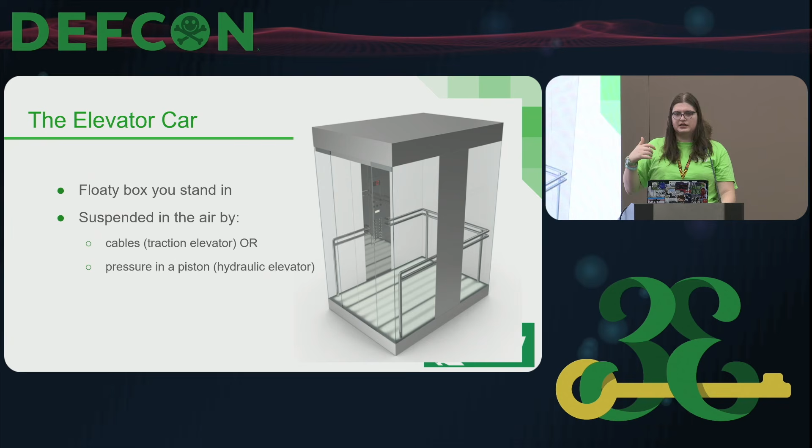Let's get started with some of the basics and some of the terminology that we're going to be using. So the floaty box that you stand in is called the elevator car. It is suspended either from the top by cables, that's called a traction elevator, or from the bottom up using pressure in a hydraulic piston, that's called a hydraulic elevator. So these are how they move. Oh, and important is, for the traction elevator, there's a counterweight to counter the weight of the car, and that is one of the dangers that we're going to be pointing out about hoistway access, which again you shouldn't do.

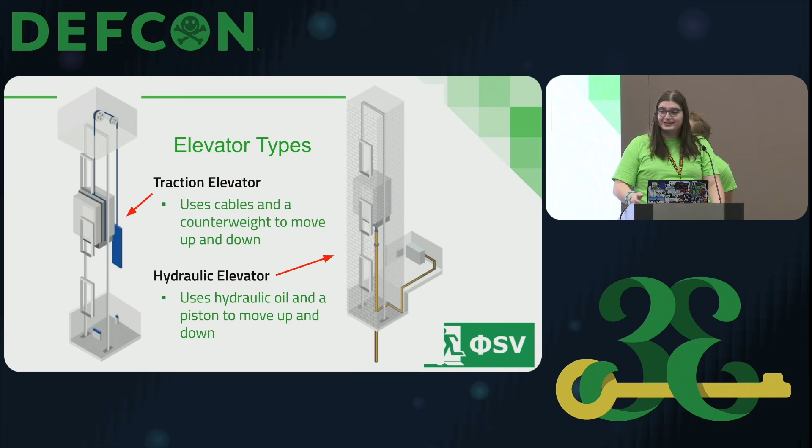Now, there are instances where we can't necessarily use the car buttons because they're locked out. The elevator controller is not letting us because we haven't presented a valid credential. And how can we avoid registering our car call, but still make our way up to a restricted floor? This doesn't always work, but when it does, it's actually kind of neat. And to explain that, I want to explain something called homing. The elevator doesn't always just sit at the floor it was last left at.

So for example, at hotels, if it's around check-in time, it might be programmed to go down to the lobby, even if it left someone at the 25th floor, because chances are the next person using the elevator is also going to be going up from the lobby. So we want that person to wait the least amount of time as possible so that it's a better user experience.

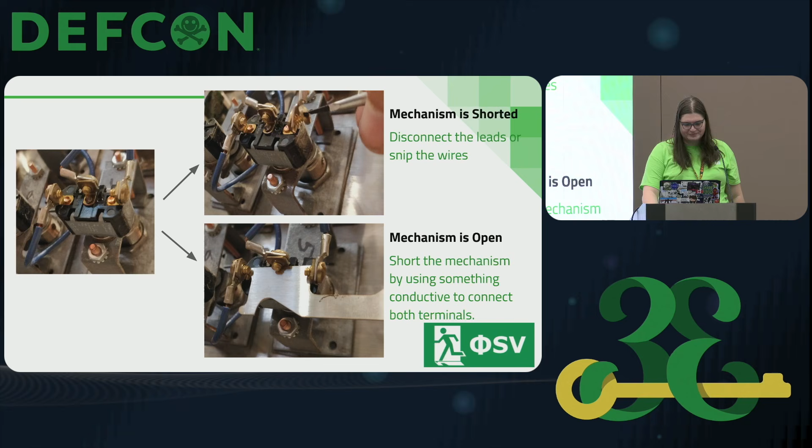Oh, and another one that sometimes comes up is when I press a button, it lights up, but then the elevator controller realizes I shouldn't have access, and it unlights it instead of staying lit up like a car call would normally behave. Can I just push it in, hold it pressed in, and then it'll just stay lit up the whole time? Almost certainly no. We gotta address this sometimes. Almost certainly no, but Bobby has seen it happen in 2 engagements, I think you said? 2 engagements, yeah. This has actually worked. We have no idea how it worked. My presumption is that he was just seeing what happens and then it worked. I don't know. So if you have nothing else you can try this, but it's probably not gonna work.

Alrighty, and I'm gonna pass it off to Bobby for hoistway access, which will start with a safety disclaimer again. Alrighty, so we're gonna get into hoistway access. So once again, another quick safety disclaimer. This is something that should be performed by trained professionals only. It is very dangerous, it can kill you. There are a plethora of things that are obviously dangerous in these pictures. There are also a ton of things that are not visible at all. So please don't do this unless you know what you're doing and have the training. So we're gonna start off with the anatomy of an elevator door. So there's a few different doors actually.

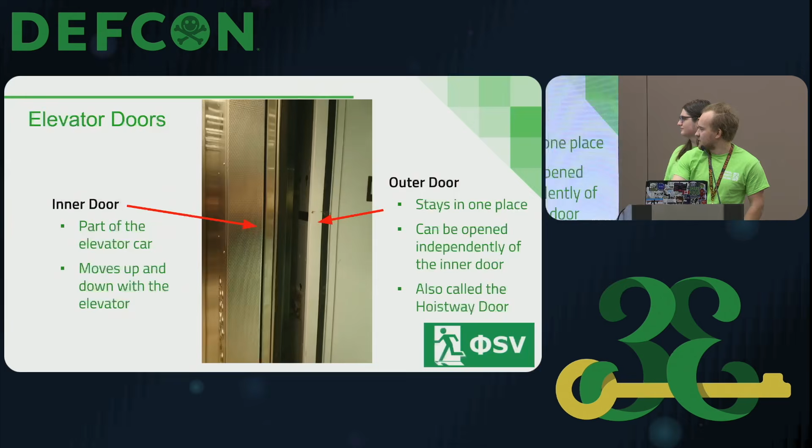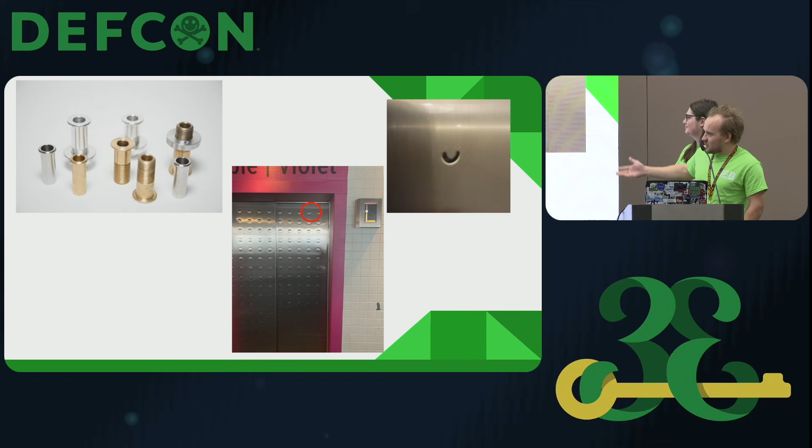So here, we have an escutcheon hole. Here, escutcheon hole, escutcheon hole. You're gonna be amazed at this next one. Escutcheon hole, and ooh, look at that, even more. So as you can see, generally, it's a tiny thing. It's going to be at the top of one of the doors. It can be a few different shapes, but the function is essentially the same.

So how do we enter the hoistway? The big question. So keys do exist. They are interacting with the escutcheon holes. We're not going to discuss precisely what keys. They are out there for professionals who are trained to use them. They allow you to open up the doors. Bypasses also do exist for this purpose. Again, we're not going to cover those. If you are a professional who knows about elevators, it's pretty easy to figure out with the mechanics of things how you might bypass the escutcheon hole at all. Again, please don't do it unless you know what you're doing.

So let's say you are trained, you know what you're doing, you open the hoistway doors. You've already put your elevator car on the floor below you, meaning that the top of it is at a height where you can access it. And you're looking down at it, and this is what you see. So what's going on in here? What are all these things that we're looking at?

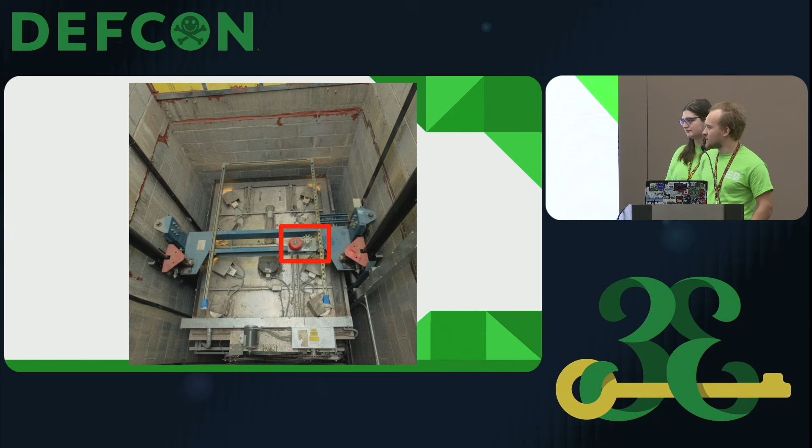So first off, we have this little box there. You can see that there's a red bell on it. You can see that there's something next to that. That's a light bulb. And that little box is the car top control box. So this is how a trained technician or elevator professional would control the elevator's movement from within the hoistway. This has a light switch for the light. It usually has 120 volts for tools, and it has controls that let you move the elevator up and down within the shaft.

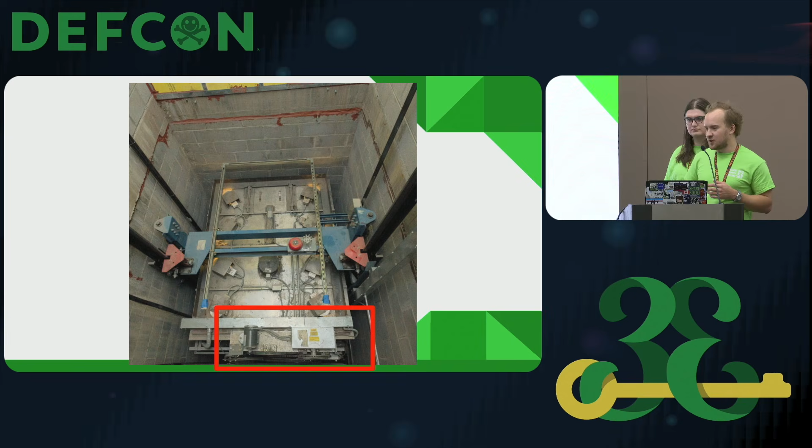Next up, we have this down below here. So this is the door mechanism. This is what allows the doors to open and close on the elevator car specifically. So you can see there's a motor there. It's belt driving a little gearbox with some mechanisms that open and close the doors. And this is also what opens the actual doors in the hallway. So the way that works is when the elevator comes to the right floor, the inner doors and the outer doors engage together, and so this mechanism on the elevator car itself is going to open both sets of doors simultaneously.

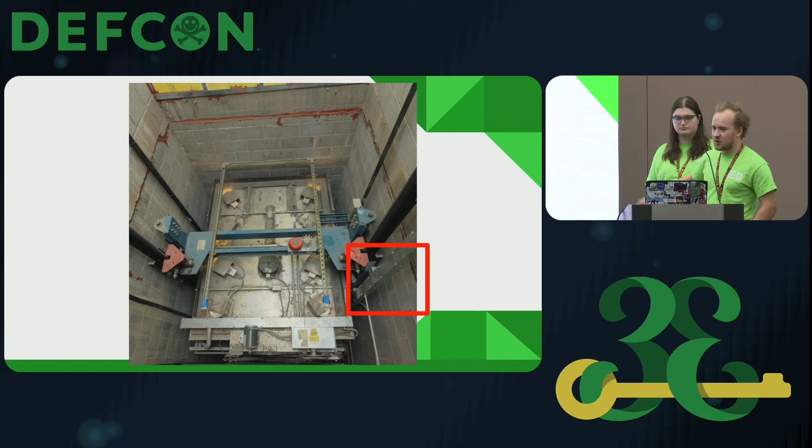Here you can see what's called the cable riser. So we have buttons on every single floor, and how do we get those signals up to or down to the elevator control room? Well, the answer is that you can see there's some conduit going out from below into this cable riser. This takes the cabling up and down the shaft.

Here on the side, these are called the guide rails. So these do not have to do with actually raising and lowering the elevator itself with force. All that these are here to do is keep the elevator from rattling around inside of the shaft. They make sure that it stays on a trajectory up and down.

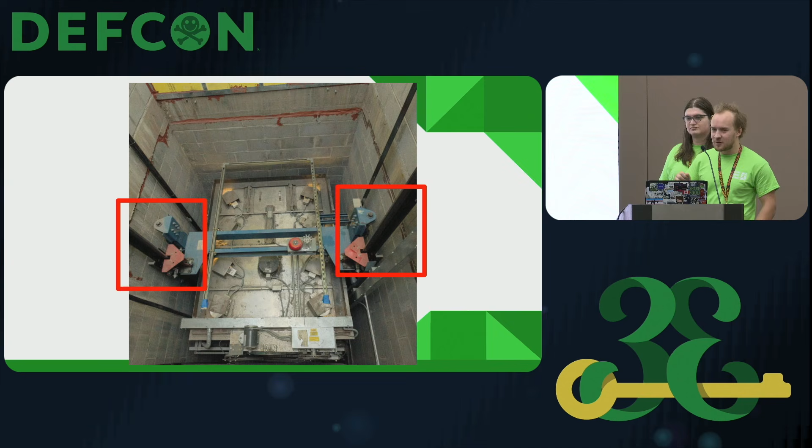And these are one potential pinch area. So as you can see where those little red triangles are on either side, if the elevator is going down and you happen to brush up against a rail, it's probably just going to tug up on you a little bit. But if the elevator is going up and you were to have long clothing, hair, a finger, really anything go in there, it can be sucked in. And the elevator is not even going to think about that small amount of additional force of you being pulled into that.

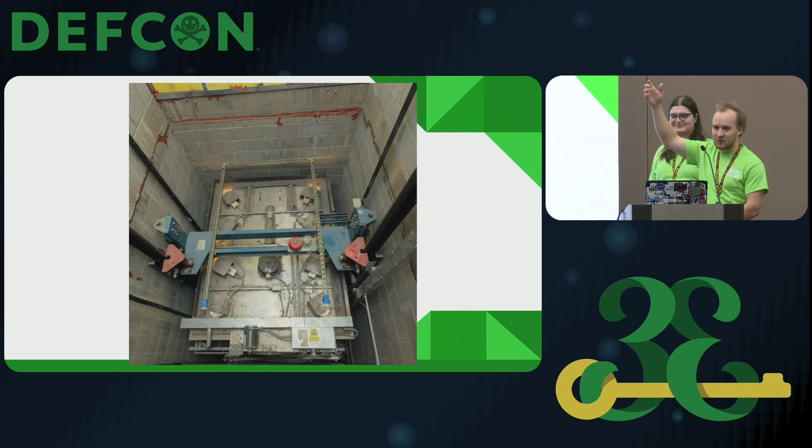What that means is that on the bottom, as you saw in the earlier part of the talk that Ege did, it has a huge piston underneath it. Hydraulic elevators are somewhat uncommon. Generally, they are capped at about 5 floors because if anyone knows hydrodynamics, if you have a 1,000-foot tall piston with fluid in it, you are going to have some insane pressures at the bottom of it.

So hydraulics, you will often see them in smaller buildings. You will never see them in big buildings. Anything 5 floors and over, for the most part, is going to always be cable. There's a few rare exceptions, but generally speaking, it's cable in any big buildings.

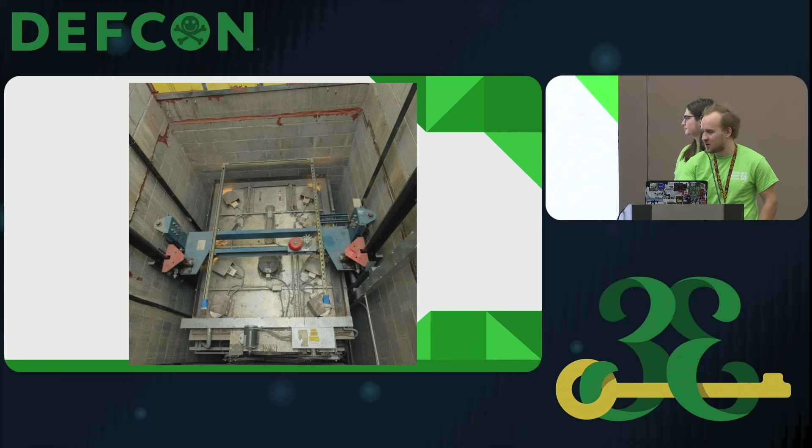And this is an example of the top of a cable or traction elevator. So you can see a bunch of cables attached in the middle. There's our car top control box. This one has a nice guardrail to make it a little harder for you to fall off of it. A lot of them do not.

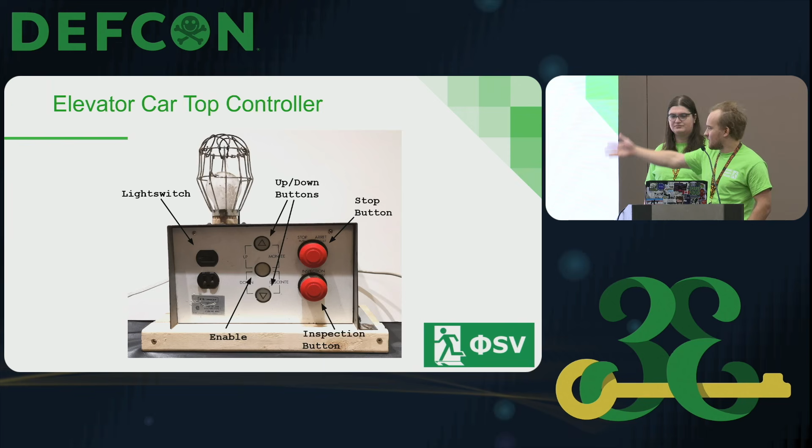So this is the car top controller. This is an older model. You can see we have a few simple things here. We got power, we got a light. We can move the elevator up and down here if we're a professional. Another newer one, as you can see, they don't really change in terms of actual function. And then here, this is one of the newest models. So they're making it a little brighter, but again, the buttons, the switches, it doesn't really change.

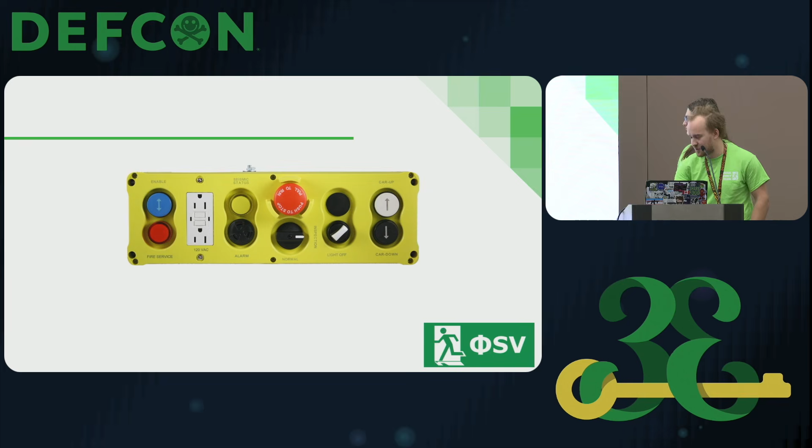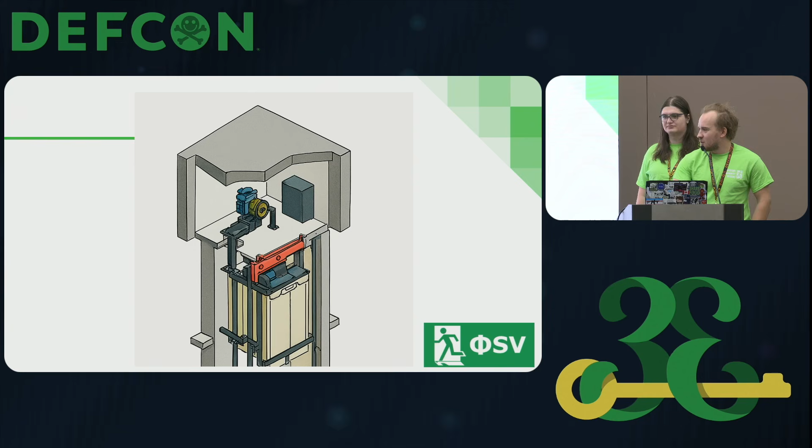So we've gone through how a bunch of different modes work. We've gone through how the elevators function. So let's talk about how is this useful to us? Where can we actually bring this into a pen test potentially? So we're going to go through 3 different case studies. We're going to talk about a parking garage lockout, you may be familiar with that, hall call lockout, and social engineering.

And none of these involve the hoistway, but these 3 are incredibly powerful. I've used these on quite a few engagements, and again, rules of engagement, a lot of the times they're not going to want someone messing with anything too much, but these three, literally just social engineering, you're not using keys most of the time, you're doing hardly anything.

So first off, we have parking garage elevator. So let's say you're in a parking garage. Generally, those are open to the public. You can get a spot there. And the elevators themselves are locked out. So they have RFID. They have something to keep you from taking it up into the main areas of the building, unless you are someone who is supposed to be there. So there's a few different ways that you can get there without that access.

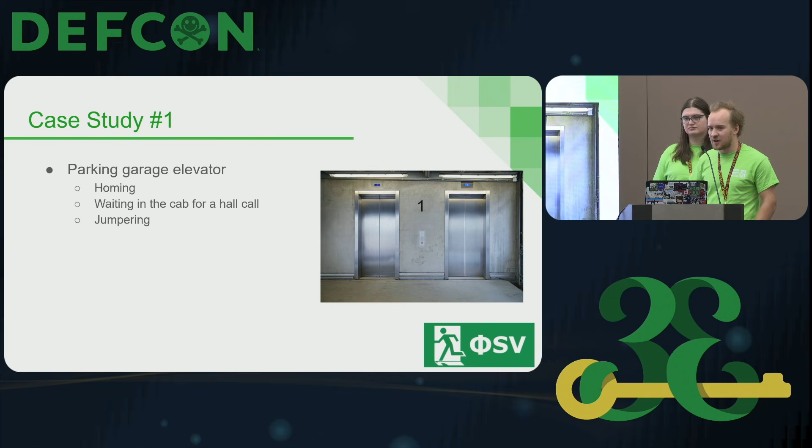One of which is homing, as mentioned. So if you just call the elevator, hop into it, you don't present access, and you just wait. The elevator may home on one of the higher floors. Oftentimes they'll home on the ground floor. Parking is below that, so you can often be brought up to the lobby. Another one is waiting in the cab for a hall call.

So this one works way too often: hop into the elevator, and someone at a higher floor, especially if you're going during working hours, is going to call the elevator at some point. Usually they don't have dedicated elevators just serving parking garage to ground, although that does happen sometimes. But if they have one that's doing the full height of the building, there's a very good chance someone, say on the 30th floor, calls it, you're sitting in there waiting in the parking garage, and you get brought up to that floor.

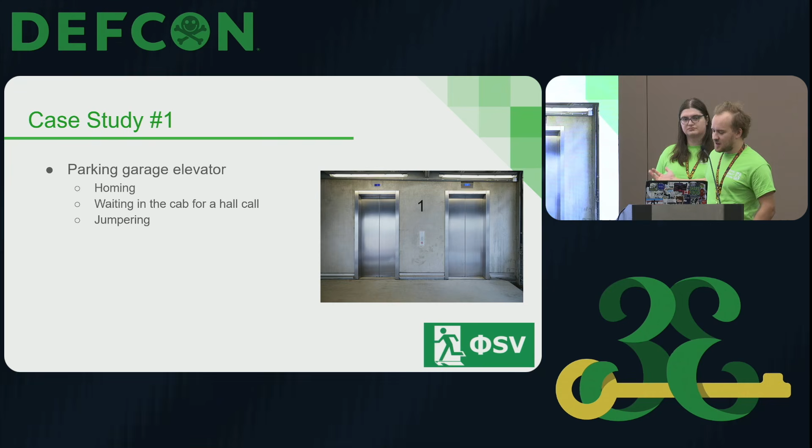Finally, we have jumpering, as AA covered. You can jumper some key switches, put it into independent service mode, and that will get you out of there a lot of the time. So the second one, case study 2, is hall call lockout.

And so the final one we have is a case study. So for social engineering case study, there are a lot of ways to go about this. I'm sure some of you have even done this, and this is definitely probably the place that you might start with elevator hacking.

So first off, we have piggybacking. I'm sure that you're familiar with this in condos, for example. You don't have a key, you're visiting your friend, you walk in, someone who lives there walks in at the same time, and you just follow behind them. The same can be said for elevators. And oftentimes, what you can do with this is phone calling a friend.